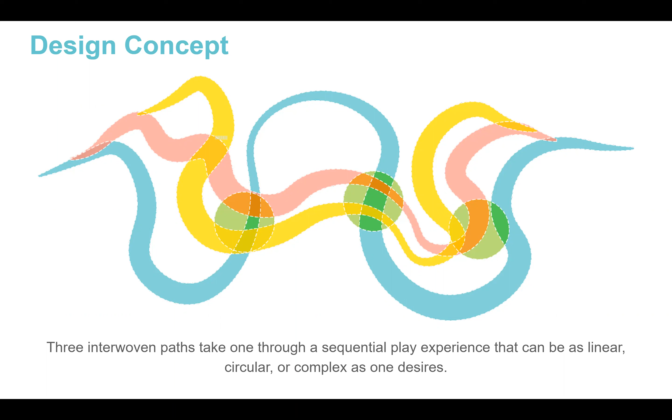Maintaining the calmness and the serenity of the space was one that we heard. Maximizing green space and the openness of the space as best we can, given the framework. Considering wildlife and the effects on habitat in those spaces. Educational opportunities, so maybe there's an opportunity to incorporate that. Environmental stewardship, accessibility, obviously huge things for us, just as our overall design parameters.

We talked a little bit about vending, we'll see how we can incorporate that in the future. Maintaining the north and south embankment in its current place. Concerns about noise - I think we all agree it's a very noisy site, and we do need to make sure we're mitigating that as best we can. And then considering wide ranges and abilities - I think we had one younger participant in the community meeting, might have been a teenager, thinking don't forget about us, don't forget about me when you're designing these play spaces.

In the 45-day review period, though, we heard a lot of other different elements. I want to make sure that, as Sarah mentioned, we have the project website - we encourage you to all go there, where every comment is posted. I think we had over 140 some odd comments during the 45-day review period - some long, some short, some novels, and some just simple supportive messages. But we did hear a couple key themes that I posted up here on the screen.

One was this idea of making sure that we restore and preserve the space. Making sure we have accessibility and safety within the space. Consider the proximity to different elements in the adjacent areas. Creating a sense of calmness, openness, intimacy - I know sometimes that might seem opposed, but I think that's something we really strive to achieve in our design, and we'll talk about it in a little bit.

Obviously, habitat, wildlife friendly, promoting environmental stewardship, and how do we educate youth about that? Minimal maintenance - I think that's something we all want to make sure, that this is a space that's resilient and durable and easy to maintain. We want to make sure you don't have to keep calling someone if something keeps breaking, we want to make sure it's maintainable. Enjoying the seasonal interest, reducing noise, nature-based materials, and this idea of multifunctional green infrastructure we'll talk about here in a little bit as well.

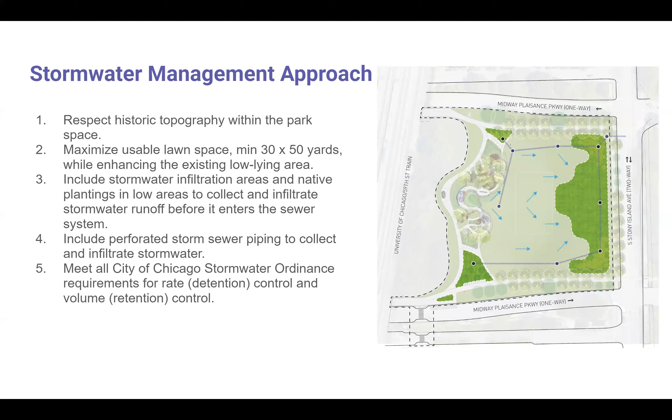But the other part is providing a crosswalk and a drop-off on the south side of the park, with an accessible walk and pedestrian safety bump-outs to shorten the distance to cross the street. Having that signed appropriately, ADA accessible, and creating a safe crossing across the Midway is something we think is really important.

This provides us a couple different opportunities to go to different adjacent facilities. We talked about the importance of proximity to things like bathrooms or other areas. So we have a crossing now at Stony on the east side, and we can go to the parking lot, go across, or go south here on the Midway.

The second thing we've been working on is accessible sidewalks, but also adequate signal timing. That's another consideration when someone might be mobility impaired — making sure we have adequate time to cross these streets. That's one thing we made very clear to the DOT in talking through our needs, and they're working with us on that as well.

We're coordinating access with the public parking lot to the south — that's ongoing. We're also exploring accessible parking along the Midway. This is actually a unique challenge we brought to the Department of Transportation. If you go anywhere in Chicago, you're not going to find an accessible parking space on a city street — that's usually not done in accessibility codes. This is one thing we're trying to push forward, finding a reasonable solution so we can have these parking spaces along the Midway.

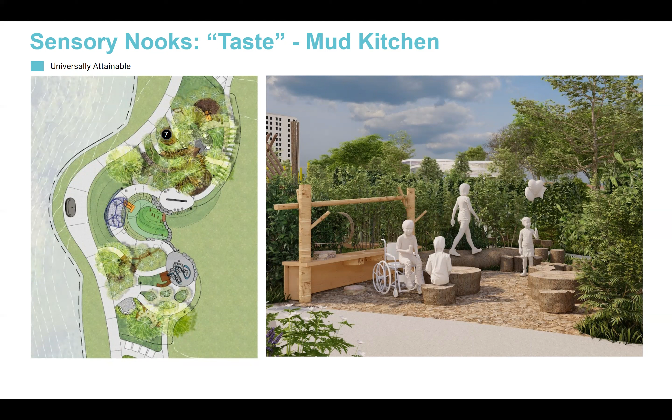The first thing is we want to make sure we respect the historic topography within the space and how those landscape areas are laid out. That's something we've been really clear on from our first few meetings, especially in consultation with our cultural landscape team, and something the SHPO is going to be very keen on — making sure we respect that.

But the second piece is we want to maximize that usable lawn space. As I mentioned earlier, the minimum 30 by 50 area, but also enhancing the low-lying space on the east side of the site.

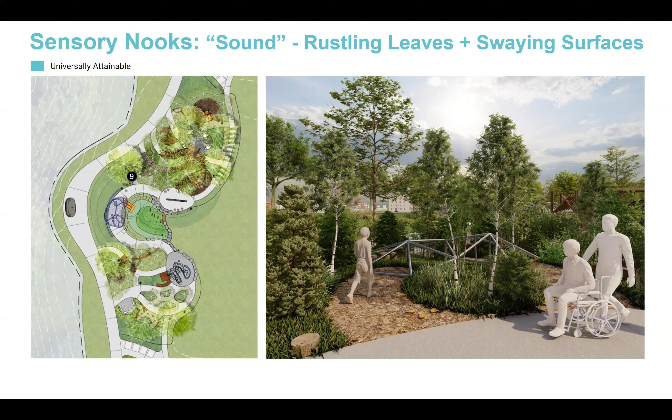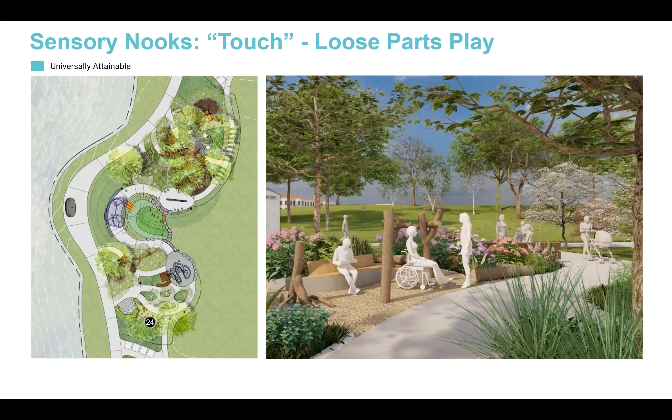We're going to include stormwater infiltration areas. We want to make sure this water gets down into our groundwater system as fast as possible, to minimize impacts on our sewer systems. We all saw the flooding here the past few months — we don't want that. So we're going to try to infiltrate as much as possible, which is great because we have a lot of opportunities for infiltration, especially with the sand below the various landscape areas. We're including perforated stormwater sewer piping to help collect and infiltrate that water into the groundwater, and we'll obviously meet and exceed the Chicago stormwater ordinance.

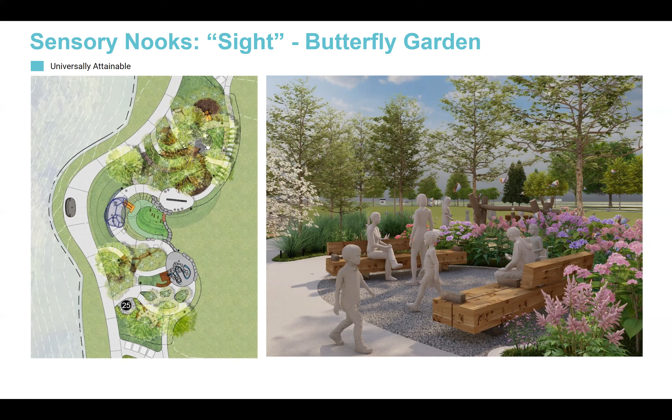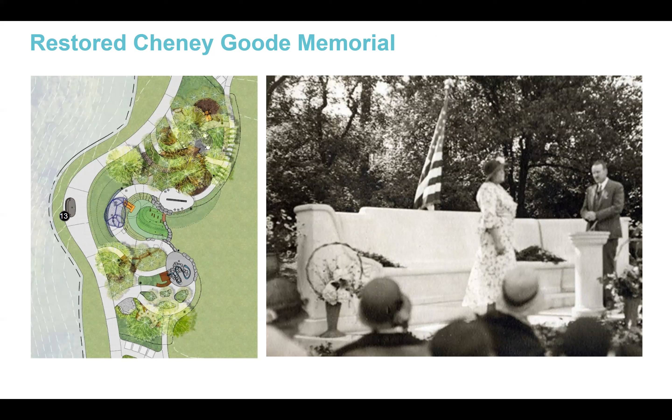Just a couple quick support amenities I want to talk through on the plan. I think these are some things we really wanted to highlight. In the center area of the space near the Cheney Goode Memorial, we are going to be providing a shade structure. Shade is extremely important, especially in new spaces, so making sure that trees on day one just won't cut it.

We need a shade structure out there in the center of the space. We are providing a drinking fountain and bottle filler. We mentioned the temporary or potential temporary restroom locations, so there are areas for those facilities to be placed if need be. We have our vehicular drop-off zone to the south, bike parking just adjacent to that, just north of the pathway, and then a series of park signage and educational signage throughout the park.

So what does this all look like? I know the plan's probably a little boring. Let's start looking at this design space.

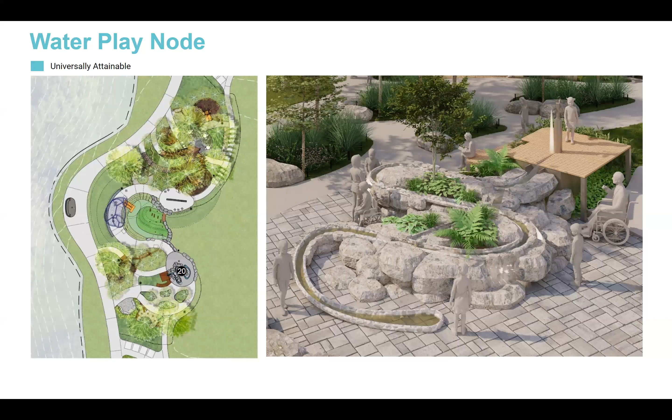And then we have our ribbon walkways as they work through the play space, providing different levels of challenge and opportunity as you make your way through the space. And we have our various sensory nooks dotted throughout the landscape. I'll go through a series of enlargements of these.

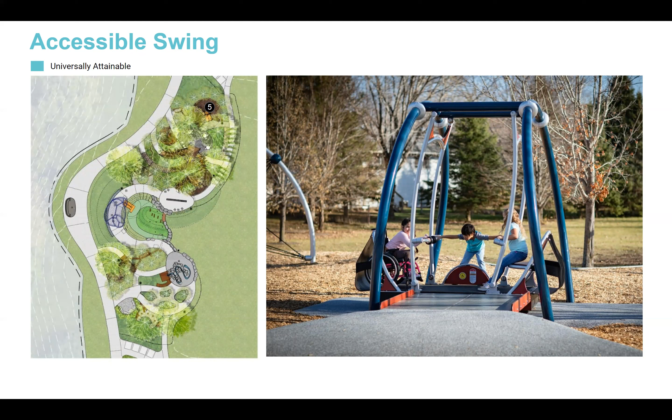If you ever get lost, on the left-hand side they have little numbers and keys so you can understand where the space is. And then also what we're talking about is the topic point, why we're looking at this, where it says universally attainable at the top.

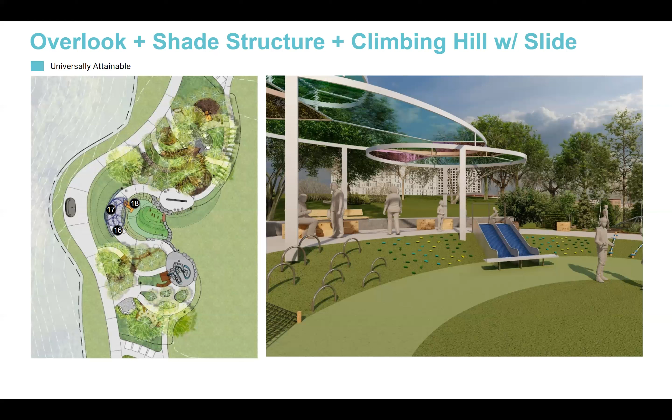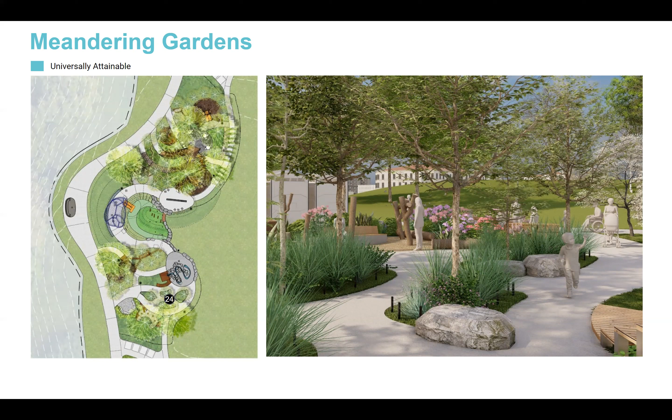And then just past that to the left, we have our sight nook, right? So this idea of how do we work within sight and challenge our vision - we have specifically a butterfly garden. We always want to do multiple things with our landscapes, so we have a butterfly garden to help with sensory and sight issues, but it's also helping with our pollinator issues. We want to make sure we provide pollinators and all the great native landscape within the space.

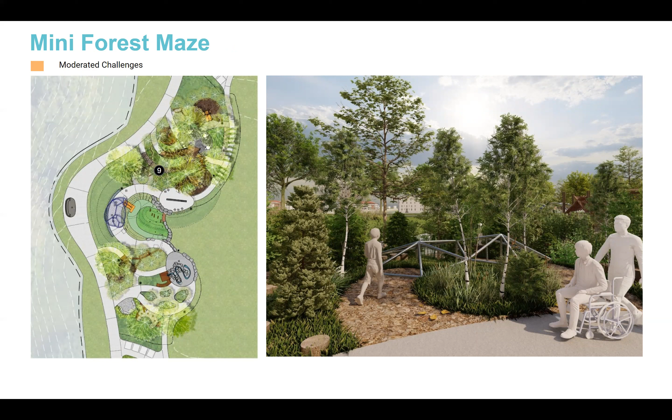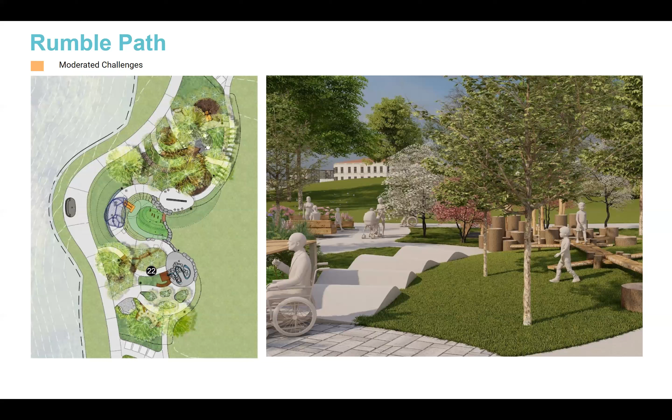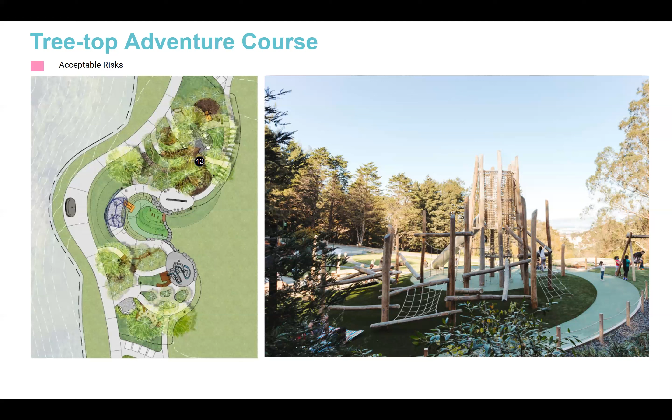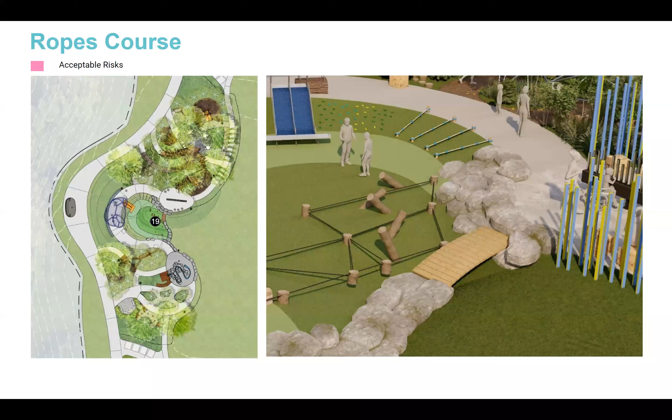There are opportunities for meandering gardens. I mentioned earlier, low maintenance—when talking about gardens, the idea is to provide drought-tolerant, low maintenance native plantings that will thrive in a play environment and set them up for success. You can see there are small barriers around the side to keep kids from running through the garden space, and maybe keep the dogs out, while still providing that variety in the landscape so it's not just concrete and grass.

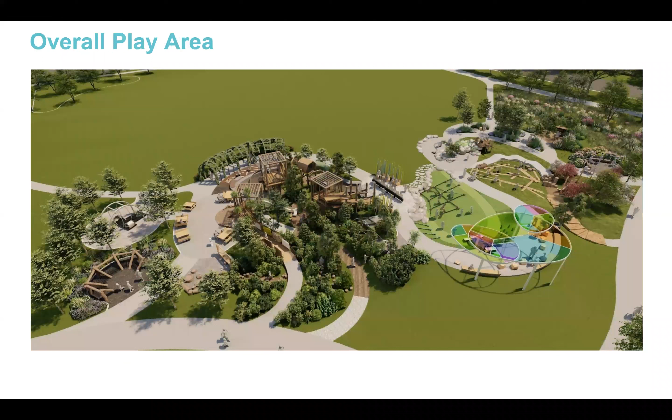Then there's this opportunity for enclosure. We mentioned earlier this balance of openness but also a sense of intimacy and enclosure—I think this is one of the areas where we achieve it pretty well. This is the idea of a mini forest maze, providing an opportunity for a quick moment of enclosure within the space as you walk through the landscape.

Another really fun thing we're excited about is this idea of a rumble path. It's a concrete surface, almost like a little park, but really tight, designed for wheelchair users so they can challenge themselves going up and down maybe some steep slopes or a tight cross slope, adding another level of fun and excitement within the playground—it's not always just a simple concrete sidewalk. Off to the right is a challenge course, a balance beam made of logs, maybe for a brother or sister to race through the space. It's about cooperative play—we're not trying to single one group out versus the other.

We want everyone to play together within the space. And then that kind of leads to some of our greater challenges right here.

So we talked about more of our different paths, different opportunities, maybe a small ropes course, still low to the ground, not a very high thing, but something that can challenge you physically and mentally as you manipulate or climb up the side of that small slope.

The one thing we're probably most excited about is the Treetop Adventure Course, giving visitors an opportunity to get up in elevation, not very high, but high enough to be within the tree canopy so you can see the trees in a different way instead of being on the ground staring up at them. So it provides visitors an opportunity to get up off the ground within the space as well.

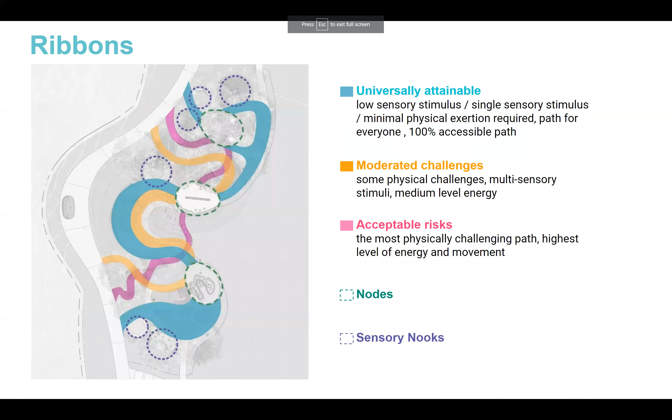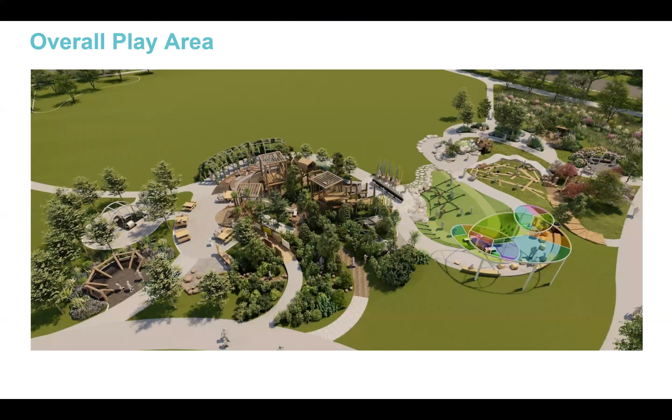Part of what I was going to ask is sort of answered when you answered Bronwyn's question about the wetland. We didn't see any visuals, so I wasn't sure how that was being handled. So there's an area that is not going to be mowed, it's not going to be just grass. There's going to be native water-loving plants in there that are going to grow because they have more water than the lawn part.

I understand you want to hasten the excess water into the groundwater, keep it from going into the sewer system. Is that going to meet the Army Corps of Engineers requirements? I think it's a Section 404 review that they do around the Clean Water Act in terms of wetlands. So if it's not being drained like it was going to be drained before, is it still going to go through a review with them, or how does that work?

We're not required a federal permit because CDOT mitigated for the wetland area during a previous phase of the project. So we're going to be developing this kind of independently and locally, like we do at many of our other sites. There won't be, that I'm aware of, any requirement for a 404 or federal process, but it will need to meet all of the City of Chicago's stormwater ordinance requirements, which are very stringent. And I would say, professionally, as landscape architects, and someone that employs ecologists and people into native landscaping and plants, it will be of high quality.

Yeah, and it will be maintained as a natural area, so it will have a special layer of maintenance to it as well, like our other natural areas. In terms of the central portion, there are native low-growing grasses that don't need to be mowed. And I'm thinking about the transition between the wetland area and the center, if it would be possible to have the whole thing be mow-free.

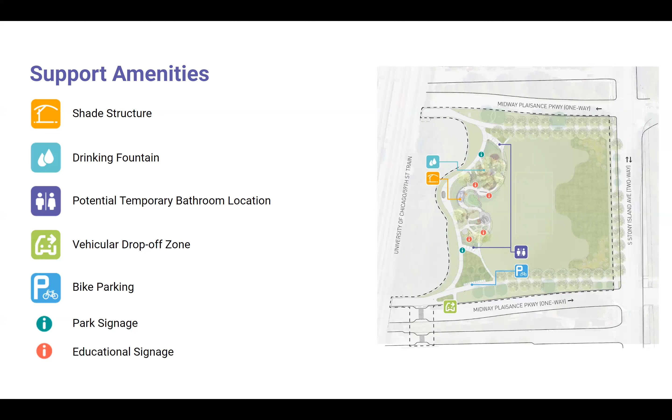Hi, Christy Ronson again from MPAC. There was a comment in the last comment period, the 45-day period, from Landmarks Illinois, bringing up the question of who would be the conservator to restore the Cheney Goode Memorial, and they brought up a National Park Service 1999 professional qualification standards. Do you anticipate needing to bring somebody else in that's an expert in that kind of restoration? I understand it's sandstone, so a fragile monument, or would you guys be doing that?

As part of the public bidding process, we'd be providing plans and specifications that I'm sure would be in line with what you're talking about. Can I add to that? The SHPO is also very interested in the specs and plans for the restoration of the Cheney Goode Monument, so we will not move forward without having everything finalized. But they will need to be qualified in that line of work. Is that something where we just hire some random person off the street to handle? No, there will be a qualified restoration specialist to deal with that.

Okay, and I was going to ask about the restroom as well, just concerns about what that actually would be, the temporary one, but that was answered. And I'm not convinced of the need for the shade structure. I think the general comments from people have been that the less structure the better, something raised up, and I'm not convinced it's necessary because there's so much shade from the tall trees on the west side there. But if it did need a shady area, maybe something a little more historically appropriate. Thank you.

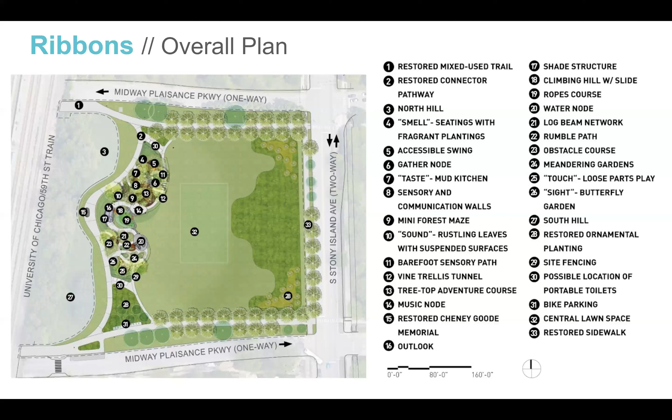But I keep hearing this terminology being thrown around, and again, I mentioned before, being a former fed, that wetlands, at least to me, has a very particularized meaning. And I'm not, like you said, you're not a lawyer. I'm not someone that makes assessments, but in my experience, that's not a wetland. And I lived in Hyde Park proper for over 20 years.

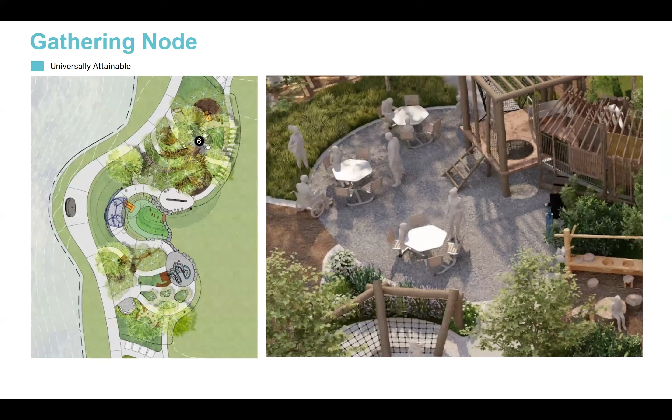Again, so terminology that is being loosely thrown around that has a particularized meaning provides a disservice to the public when you're trying to talk about these things. The gentleman who talked about this said it was just a flooded area. I was a AYSO soccer coach, playing on the Midway, taking my kid there. We could not use it, it stayed flooded. Being flooded doesn't make it a wetland in an official capacity. And it's been very unusable by the neighborhood for as long as I've lived in Chicago, which was since '77. So that's a big chunk of time.

So, am I misunderstanding, or is it officially designated as a wetland? Because I thought this was all landfill based on the Columbian Exposition, back in, I'm not a Chicagoan so I don't know, but back in the late 1800s. They talk about the golf course being landfill, stuff being dumped, the garden and all kinds of different things. So I just wanted to make that comment and mention, I don't know that this has a time limit on it, but I don't know what else, what dead horse we can beat at this point.